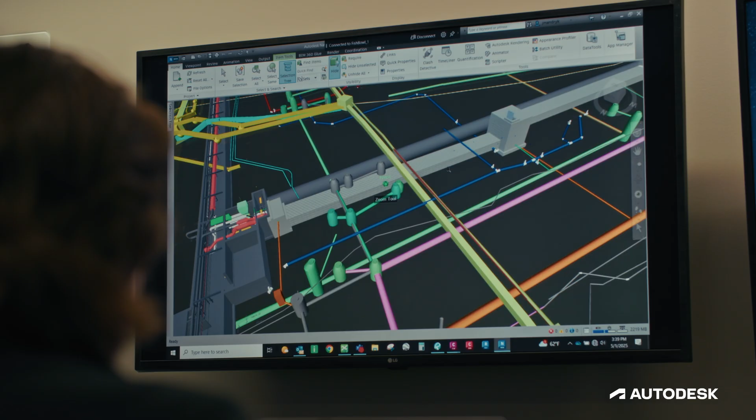If you want to integrate sustainable practices, it starts at the beginning. It's very difficult to start a design process and go backwards once you're 30, 40% in and say, okay, now we're going to make it sustainable. It has to start from the beginning.

There's long been an acknowledgement in the architecture profession that the buildings we design have a tremendous impact on the environment. Decisions we make about what materials to use, the size and massing of the building, contribute to its energy use.

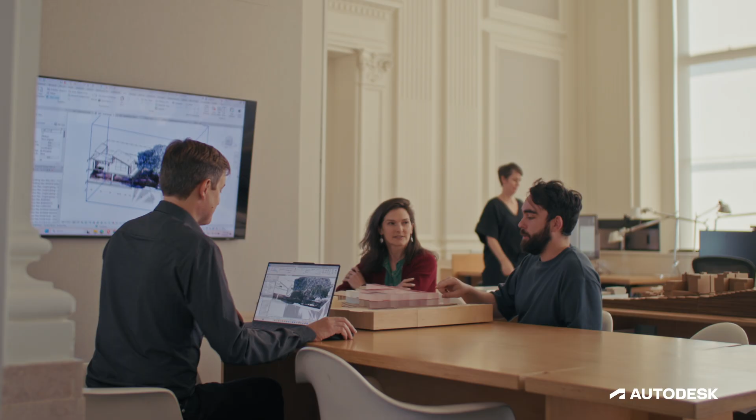Designing sustainably is a sliding scale, and it's about big decisions as well as little day-to-day decisions. These tools have made it easier to understand the consequences of those little decisions along the way.

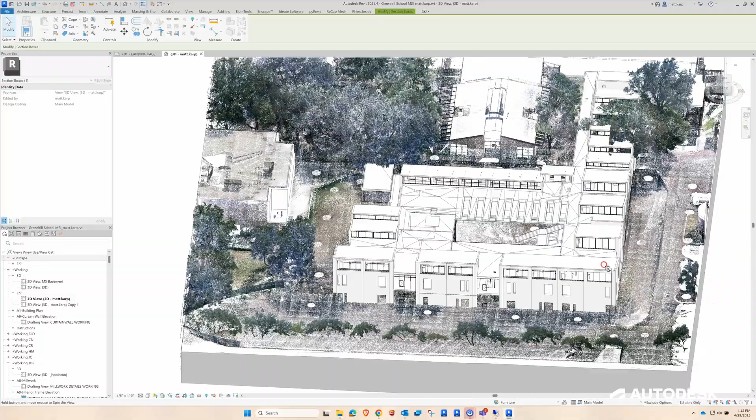We integrate sustainability from the very onset of the project, and we use Autodesk software such as Revit, even in early concept programming phases, to understand the site, its location, its environmental qualities. Things as simple as daylight, understanding how we respond to temperatures and humidity, and using plugins to understand daylight quality and orientation of the building.

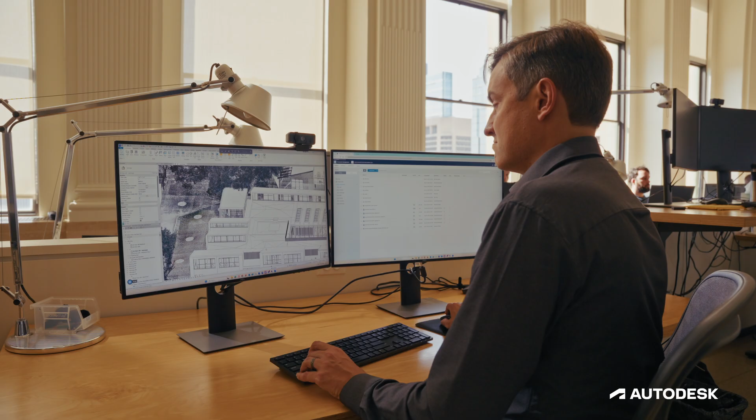Being able to visualize in 3 dimensions has been a game changer, not just in helping us validate our decisions, but to explain to clients and help them understand the impacts of what we're proposing.

Revit has become a foundation of all these other tools that get layered on. It's such a robust foundation for all of that, which really has transformed the industry.

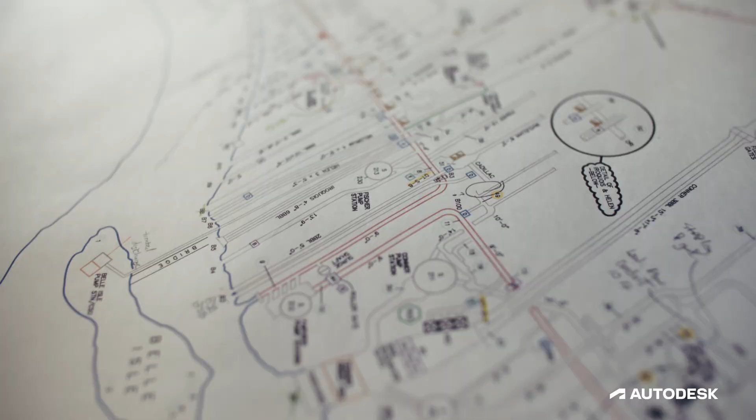Everything we do revolves around data, around the projects and managing that data, all of our design information. It's really challenging for us as an engineering firm in the AEC industry, but also a challenge for our clients.

We're trying early on in any project, during the very early concept phase, to have the reality capture data from that site brought in to the architects so that they can do their thing.

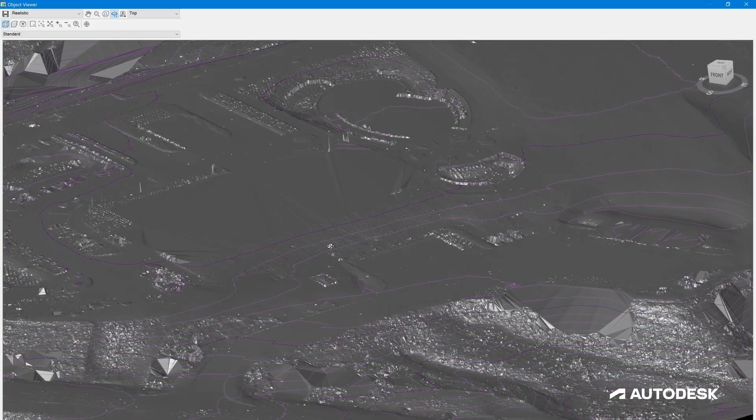Reality capture is the foundation for just about everything we do, and we need to bring all that data into our design software, be it Civil 3D or Autodesk Revit. ReCap Pro is the common denominator that takes all that dissimilar data and brings it together, making it available to our design and engineering staff.

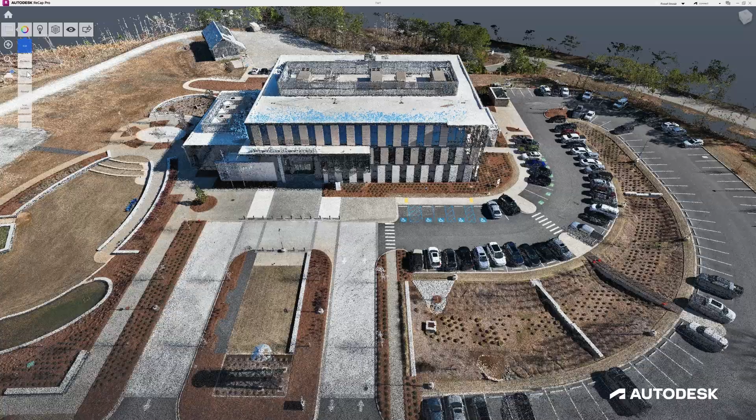We do a lot of stormwater management, also water and wastewater work, and the Autodesk products support sustainability throughout the project lifecycle. Things like Civil 3D, storm and sanitary analysis, and Autodesk ReCap Pro.

The grading tools available in Civil 3D allow us to do our grading design and analysis a lot faster, calculating volumes, quantity takeoffs, earthwork calculations, those types of things inside of Civil 3D. Without those tools, that would be a lot more difficult and the process would be much lengthier.

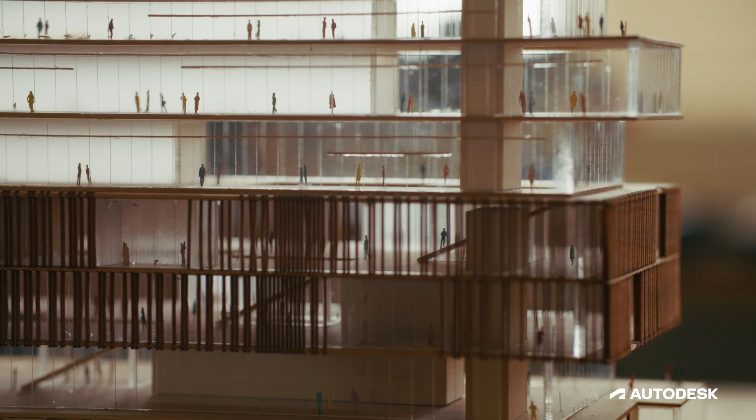Sustainability is complex. There are as many different ways of finding a window into sustainable design thinking as there are people and interests. BCJ has always been a firm that cares very deeply about designing for place and people.

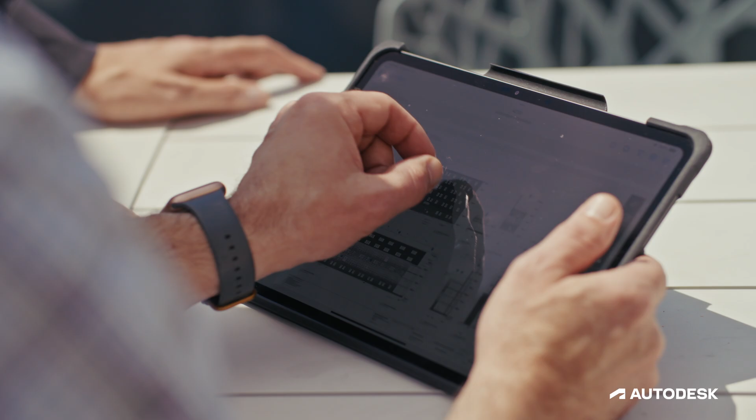We want to make sure that the buildings are beloved and that they'll last a long time, that there's enough flexibility in their design that they can be modified over time, but it's really about longevity.

Sustainability is critical in our design approach. Climate change is affecting not just our generation, but future generations. So in our design process, we use sustainability not as a layered-on approach, but an integrated approach. It's fundamental to the design and the space.

Sustainability belongs right at the forefront of an engineer's mind in the current climate. The engineer is called to protect the public welfare, and we need to be mindful of that public welfare beyond our own generation. We have amazing tools now to do that.

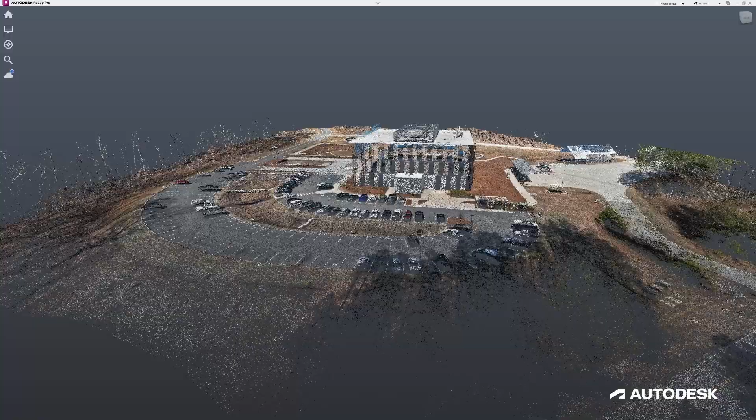I hope all the engineers out there are open to using the tools and open to the mindset that it's not going to cost more when your time horizon is 50, 100 years. It's going to cost less.